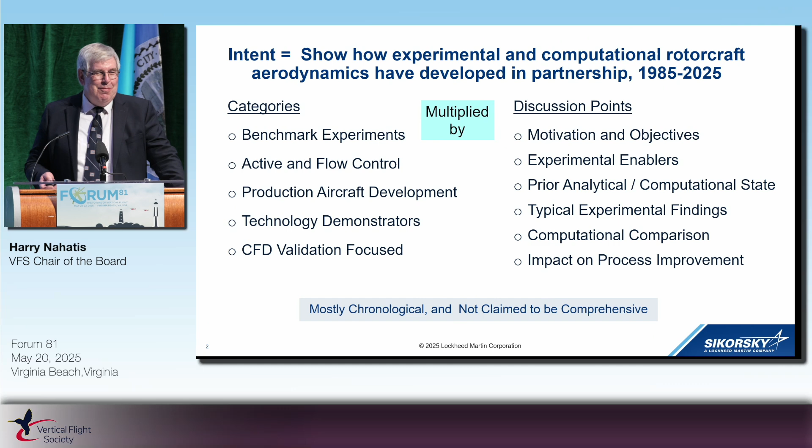It's not claimed to be comprehensive, and primarily because of the ability to get it approved through our systems, it's focused primarily on things that I and my colleagues have been involved with that have been previously published, so we didn't need to go through an approval cycle that was too lengthy.

Okay, the first topic is benchmark experiments, and the first one is oscillating airfoils and wings, which are seemingly simple geometries but needed a very significant amount of care to get to the appropriate answers.

The motivations in this period, which was the mid-1980s, was threefold: rotor blade dynamic stall, which is of interest to the helicopter community; fixed wing super maneuverability, which was of interest to the Air Force at that period; and propeller stall flutter, which was of interest to, at that time, our partner company, Hamilton Standard.

The idea, starting out on the upper right, was an 8-foot wide blade section sitting in the, at that time, UTRC wind tunnel, trying to get to realistic Reynolds numbers in the millions and Mach numbers up to 0.6.

The key experimental enabler at that point was the availability of compact, thermally stable pressure transducers that could be put into many different types of models, in this case the wing. The second was a fully digital unsteady data acquisition system. It was immature at that point, but a great improvement over analog tapes. Also, in this case, the ability to use high-powered hydraulic systems to generate any waveform of pitching motion of this model that you wanted.

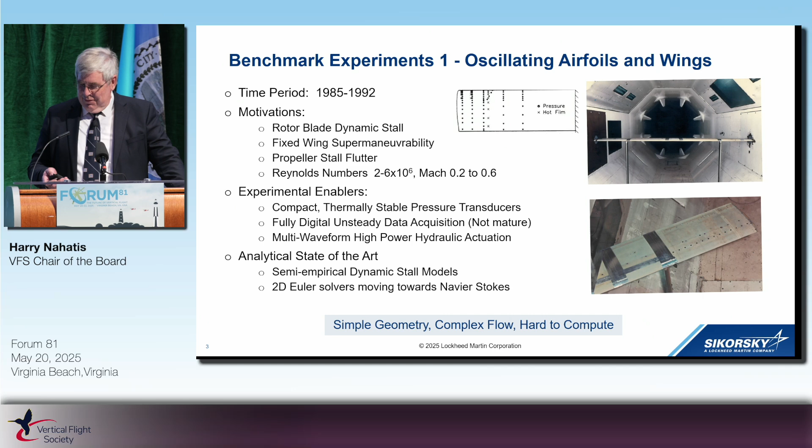Typical experimental results were many pages of black and white line plots published in that period. Color imaging was a luxury item that was expensive and complicated to do, and even more expensive if you wanted to publish it. So we were measuring pressure distributions, lift, moment, drag, laminar turbulent transition, and the effects of all the independent parameters.

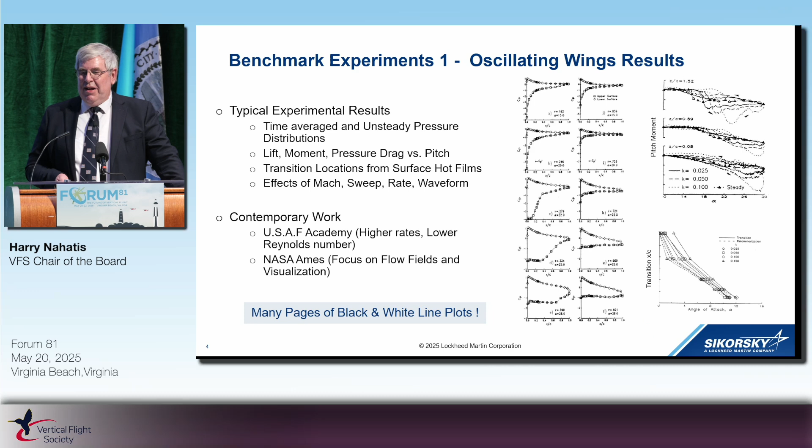Contemporary work at that time was done at many places, including US Air Force Academy and NASA Ames. Computation early on, in the 80s and 90s, was starting to use Navier-Stokes solution methods with relatively straightforward turbulence models. They didn't do a bad job, they didn't do a great job.

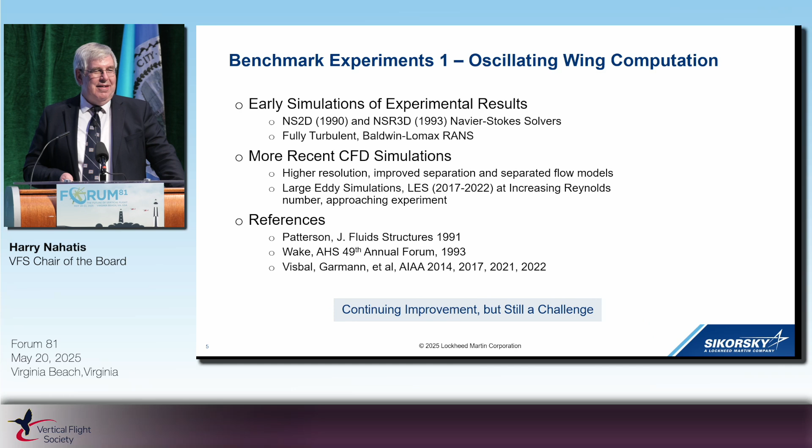More recently things have gotten much better: higher resolution, improved separation, separated flow, transition. It's still a struggle for these full-scale conditions. Large eddy simulations in 2017 to 2022 have been done at increasing Reynolds number, but it's still a challenge computationally to get the details of the flow proper at these high flight conditions.

The second series of benchmark experiments were a model helicopter rotor, slightly later, from late 1980s to mid-1990s. The motivation was a multi-measurement comprehensive data set so analysts could combine blade air loads with far field acoustics, and blade air loads with bending deflections of the blades. You wanted to expand the test envelope from relatively simple and safe conditions to high speed and thrust.

You wanted to change the tip plan form. And as important, we wanted to compare what was a UH-60A model rotor, about 10 feet in diameter, that we were testing, with the full-scale airloads blade that Sikorsky was also producing, that NASA Ames and the Army was going to be flight testing.

Again, the enablers were the pressure transducers. In this case, we were able to put 176 onto this small rotor blade. Data acquisition was more mature, and you had composite rotor blades with repeatable structural properties and long life. Importantly, this was a partnership between the US Army, NASA, Sikorsky, and UTRC. So there was some money changing hands, but a lot of intellectual effort changing hands between all these partners over that period.

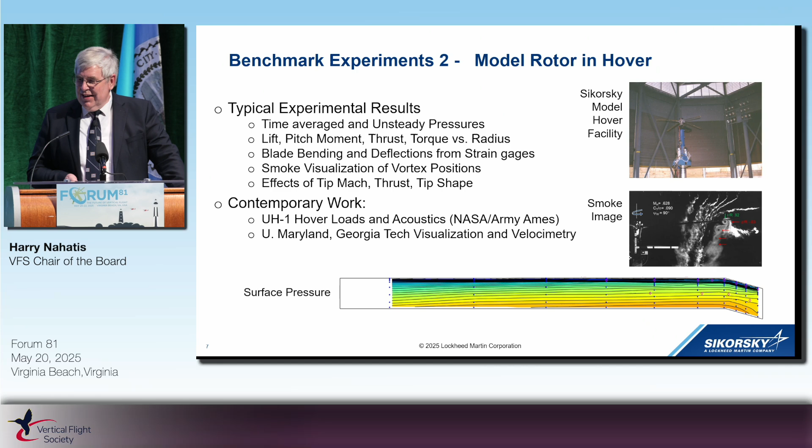Contemporary work: the Ames NASA Army folks were doing things on a UH-1 rotor before that. There was other hover work being done at somewhat smaller scale at Maryland, Georgia Tech, and other universities. And just to show that you can take data acquired before and make it in color, that was the surface pressure contours shown at the bottom of the slide.

Then the same model was put into a wind tunnel, first the German-Dutch wind tunnel in Holland in 1989. The rotor is this small thing up in the right before all of the microphones there. It was a reasonably sized rotor in a very large anechoic wind tunnel to get the acoustics as well as the aerodynamics, measuring the same sorts of things.

You then added some additional measurements when this experiment was extended 4 years later in the UTRC tunnel, getting wake positions from smoke visualization. The picture at the bottom shows tip vortices coming from one part of the blade going back in, which was actually published in Vertiflite back in those days. And you're trying to get what happens when you change all the parameters such as Mach number, thrust, and tip shape.

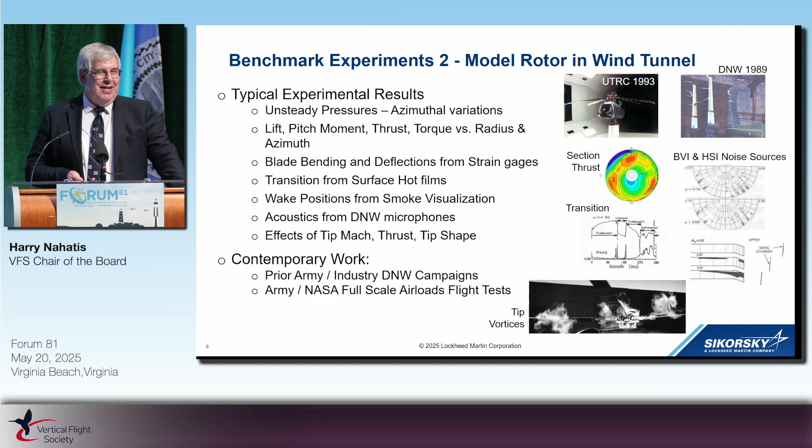There were other DNW test campaigns that the Army and NASA did in collaboration with other industry partners. And there was also a very large-scale complementary effort by NASA and the Army, taking the instrumented blades, doing flight testing in the 90s, and then going back and doing full-scale wind tunnel testing within the last 10 years. So this has been a long-term effort that's had a lot of benefits to the community.

CFD comparisons, early on, were trying to combine a little bit of data with a little bit of analysis. Prescribed wakes for hover had fair correlation. Taking measured pressures and adding acoustics was reasonable. Taking the measured aerodynamic loads and adding the dynamics analysis back in 1992 was fair. And going the other way, trying to model the whole thing again, was better, but not great.

More recently, this has all been vastly improved analytically, using transition models, blade deflections, and interactions. This is the most recent work that was done in hover, and it did quite well. There are still some differences, but this work is comparable to all of the improvements in modeling the H-60 airloads rotor, similarly with the computational CFD, CSD methods over the last 15 to 20 years.

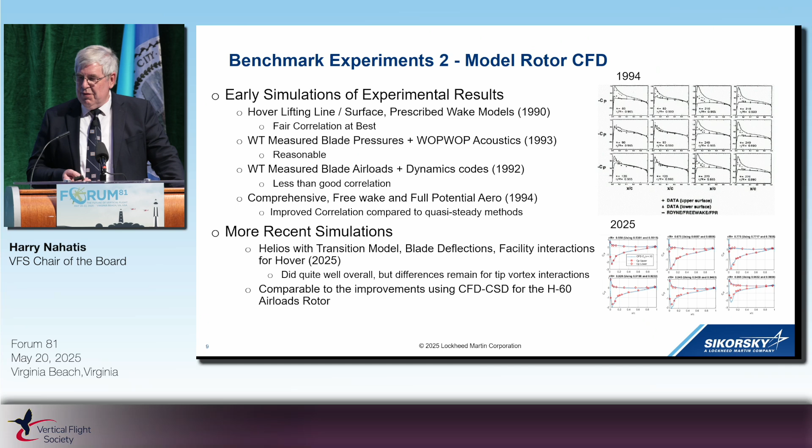The second major topic is active control. This was a very hot topic starting in the mid-1990s. Our involvement with it covered a 15-year period, up until 2010.

The idea was to find a way of breaking the paradigm of the passive rotor and improve noise, vibration, and performance. You wanted to develop the required actuators and control systems, and try to identify system-level performance. Enablers were everything talked about before in terms of measurement techniques, but also the ability to make rapidly moving actuation and control systems.

There was a lot of work being done in academia, from multiple of the people sitting here - Maryland, MIT, MDHC, and Boeing. ZFL in Germany was doing a lot of work on BO-105, CH-53G, IBC flight testing, and all of the HART II activities. The other piece, slightly later, was NASA, ZFL, Sikorsky UH-60 IBC at NFAC, which was using the same blades that had been built earlier on.

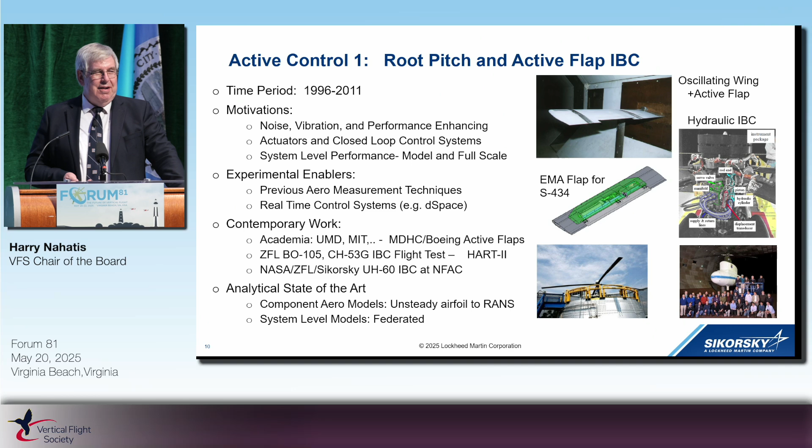The analytical state of the art at the start of this period consisted of component models for different pieces, like unsteady airfoil models. You were maybe starting to use some decent Navier-Stokes codes at that point, but the system models were really federated - you had a bunch of different models of different types that were kind of tied together.

Typical experimental results: one type of experiment was putting an active flap onto that same wing model developed before, getting pressures and air loads out to 0.8 Mach number, seeing what happens with your trailing edge flap when trying to do it during dynamic stall.

There were a variety of individual blade control efforts being done at model scale and full scale with a hydraulic actuator, trying to get there. Again, is there a performance benefit? Can you reduce vibrations? Can you help acoustics in terms of BVI? And how well is all your actuation system doing at that point?

Some lessons learned from all of this. The first one, which was not unique to us, is avoid hydraulic slip rings - trying to get high-pressure hydraulic fluid into a rotating model without having a large bucket underneath it doesn't work well. Try to avoid inserting complex systems into small legacy flight rotor blades - that's also much more complicated than it may seem at the time.

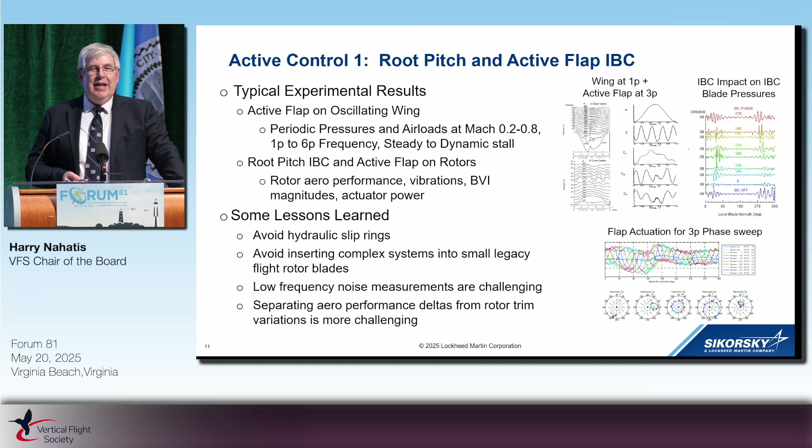Low-frequency noise measurements are challenging, even in very large wind tunnels. And the final lesson is that trying to separate relatively small aerodynamic performance benefits from the trim of the rotor is also a challenge. But it was very educational through the period, and there are many groups still working on these active control attempts, but again, that's somewhat in the past as far as we're concerned.

The next active control piece is flow control. This was late 90s to 2004. The flavor we were interested in was called directed synthetic jets. Again, you're trying to reduce drag, avoid dynamic stall of your rotor blades, and advance the technology of the flow control actuator designs and their authorities.

The basic idea of this method is that in some way you have a jet of air coming out of your airfoil, going in and out. It's helping to energize the boundary layer over the airfoil, preventing it from separating. The enablers were all the previous aero measurement and control techniques - so you're seeing a theme here, that every piece builds on its predecessors.

Another enabler was system design models for the actuators, so you could do a lot of analytical work with a reduced model early on and avoid too much experimental tinkering. The other enabler in the later period was the ability to do CFD modeling of the coupled internal flow inside the actuator and the external flow.

This was part of the DARPA micro-adaptive flow control program that was going on at the time. We were one of several teams working on that. There were also a lot of flow control activities going on at that time, and continuing, in academia.

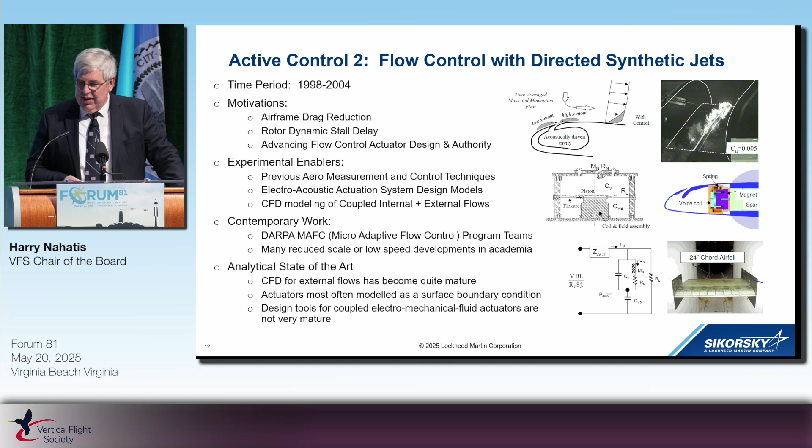The analytical state of the art by the 2000 period: external flow CFD was quite mature, but these actuators were often modeled as a surface boundary condition. You were only later on able to model the coupled system, which proved to be important in predicting the capabilities.

So the slide here is showing some of the computational results. The red is the jet coming out of the actuator slot and then coming back in again at the other part of the cycle. As you can see, we're getting very detailed analytical measurements. You're able actually to start optimizing the design.

But overall, the lessons learned was, yes, we were able to design actuators that had the authority that we needed to have, but in practice, at these realistic conditions, opening a slot hurts you before your actual flow control is able to help you, so that we were limited in the ability to meet the objectives for the higher Mach numbers that you would see on an actual rotor blade.

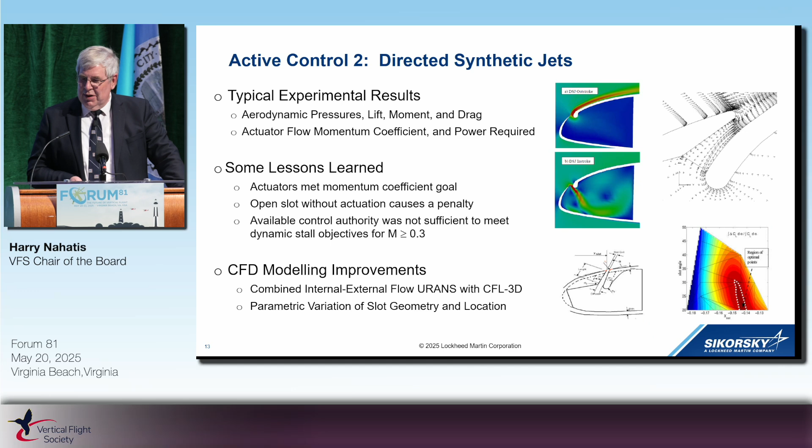So the final piece of this was a few years later in the 2012-2016 area, where we were trying to see what was the maximum ability you could get out of a flow control actuation for a rotor blade stall. The idea again was delaying stall and adding lift. This particular experiment, which was funded out of Susan Gorton at NASA, was to try and see what you could do up to a relatively high Mach number of 0.5.

So the enablers, again, were the measurement techniques, the hydraulic pitch mechanisms, all of the insight into dynamic stall and flow control that ourselves and other groups had obtained over the years. This was also using the model in the middle there, which was a 6-foot high oscillating wing that had been previously developed under the Vertical Lift Consortium project for the Glenn Icing Tunnel. CFD modeling was doing very well here for the coupled flow.

I skipped over one of the key enablers, which was the combustion-powered actuation technology from Georgia Tech, one of our partners in this. So that was really, if you're pumping hydrogen and air into the model, igniting it with a spark, that's about the strongest non-nuclear actuation system that's available.

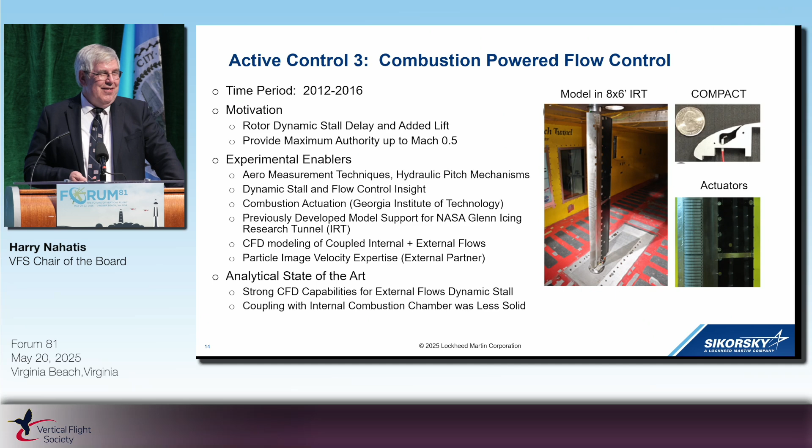So again, you're doing these related sorts of measurements, measuring the pressures and lift. We are adding particle image velocimetry there to get the flow field on the model. And the computation for the airfoil was what's called the CFL3D code, slightly more sophisticated and accurate.

The conclusions were we could clearly see the effect of flow control. The effect was primarily after stall, so you didn't really succeed in increasing the lift over the airfoil. You did increase the average lift because you were better off after it had stalled. The CFD actually did well for design and capturing the trends.

The issue became when you're looking at trying to move this onto a rotor, delivering gaseous hydrogen through a slip ring from a shaft out to the blade and delivering it on a rotor blade would be seriously challenging, even harder, I think, than delivering hydraulic fluid, and obviously could potentially have very serious consequences if things leaked.

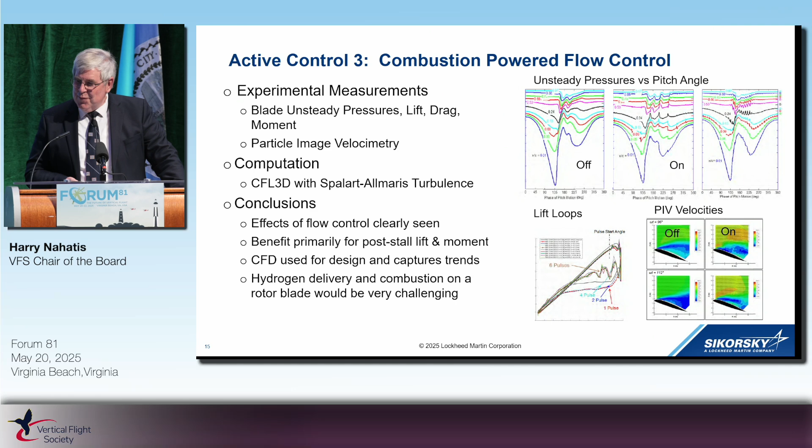Okay, so a sidebar, I mentioned PIV. The maturing of flow velocimetry over the past decade or so has been a very important addition to the experimental toolkit. The legacy was you would measure one location at a time with a hot wire or a laser Doppler velocimetry system. This required significant amount of test time, which is a significant amount of money. Early years of PIV in the mid-90s, it tended to require a local expert as a full-time activity to develop and operate it. But at that point, the resolution and the ability to go to a large distance was limited.

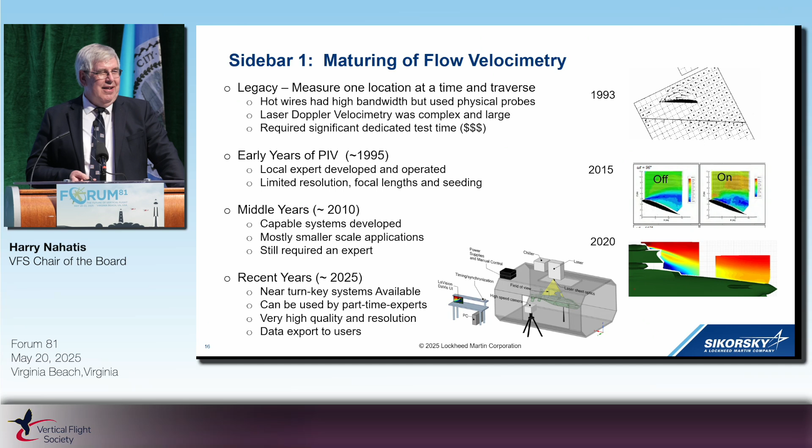In the middle years, such as in the previous experiment, capable systems were developed. It was mostly smaller scale, but it still tended to require a full-time expert to operate. More recently, near turnkey systems are available for an affordable cost, and they can generally be used by what I'm calling a part-time expert. We're able to get high quality and resolution and then export data to other users relatively quickly. The bottom is an example of that in a small wind tunnel that was added in, getting the flow field behind a model. This is a steady image, but you can do the same thing for unsteady. So that's been a significant technological improvement over the past, say, 20 years.

Okay, so now we talk about production aircraft. Production aircraft development programs were historically probably the most important use of the wind tunnel for actual industrial users.

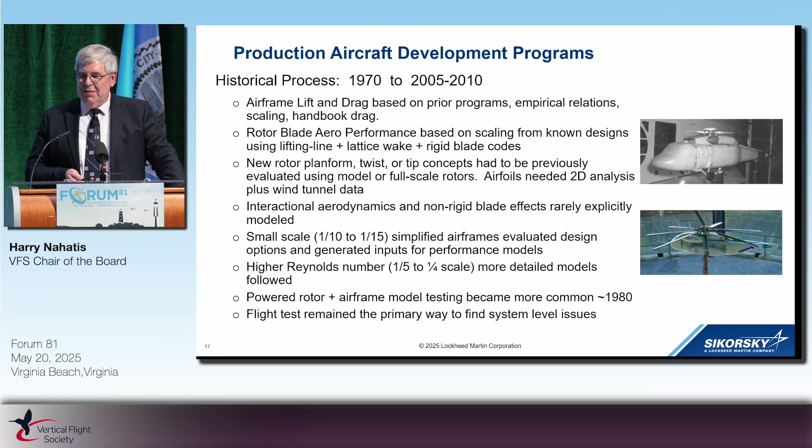So what did you do for wind tunnel testing in a development program? The number one thing was, what are the forces and moments? What's the lift, the drag, the moments on the fuselage and on the rotor? You would like to know what are the loads on the blades. You'd like to know pressures in a few locations of interest. You might put some tufts on it to identify some of the basic flow field features.

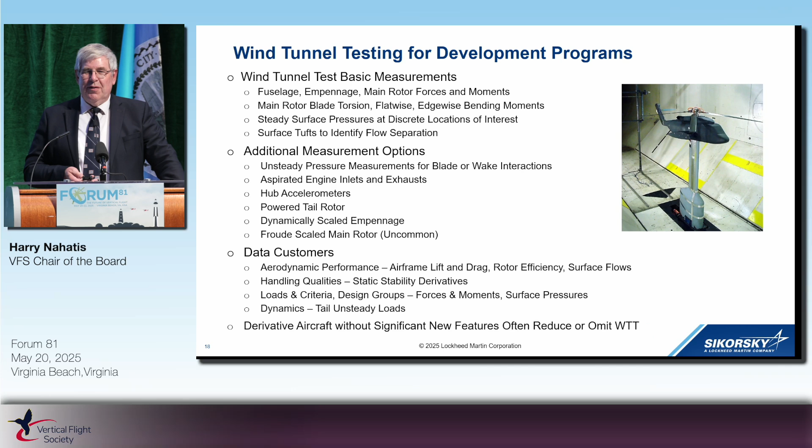You added other things on a need and budget available basis, such as pressure measurements for interactions, flow-through or aspirated engine inlets, hub accelerations. Sometimes you added a powered tail rotor, you did dynamically scaled empennage. There was a period where Dynamics was also doing rotor testing to try and get optimizations for customers, aerodynamics, handling qualities, loads, dynamics. I will mention, however, that derivative aircraft that didn't have significant new features, even in the earlier days, often were able to omit or reduce the quantity of wind tunnel testing.

So over the last 20 years, there's been continuous improvement, but at a more rapid rate. The CFD analysis of components has been grouped into larger and larger systems. You're currently in the position where you're generally able to simulate the full aircraft with tail rotors, main rotors, inlets, exhausts, internal flows, dynamics and structures, adding coupling between the rotors and the fuselage, both aerodynamically and structurally, and very recently, co-simulation putting the control systems in. The challenge remains to make it all happen quickly and reliably. And no, I'm not showing any CFD animations in this paper. There are plenty of other presentations out here for the next few days that you can see that.

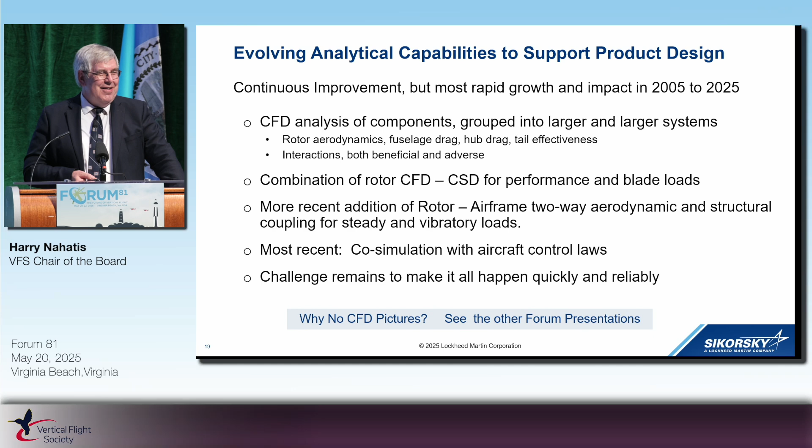The next category in development leading to an aircraft is technology demonstrators. They're different in the sense that a technology demonstrator is trying to prove some specific capability, not trying to get a unified aircraft that you're later going into mass production. So your analysis and experiment needs to focus on what's required for safe flight, what are you trying to demonstrate, and try to avoid unexpected results from flight test, or if you weren't able to avoid the results and you get them, then you need to try and figure out what happened and how do you fix it. Some examples in our company have been the X2 technology demonstrator 2008, the Raider in 2010, and the rotor blown wing that is going on now from 2023 into 2025.

I'm going to talk on the rest of this slide on the X2 technology demonstrator. That was what we call a rapid prototyping process. Analysis in the 2008 term for these configurations was kind of limited. There was no pre-flight wind tunnel testing done. The rotor design was made by one of my colleagues in the room, Dr. Bagai, using relatively simple methods plus deep aerodynamic insight. The fuselage was designed empirically, and it had a simple shape as shown in the upper right. Didn't have a lot to be analyzed. The hub fairing was based on prior wind tunnel tests from decades before, plus one small-scale non-spinning wind tunnel test, which was the effort of one of my other colleagues, Dr. Wake, sitting out here doing that. It was relatively simple, but it demonstrated that it should work. And the propeller blades were commercial off-the-shelf items.

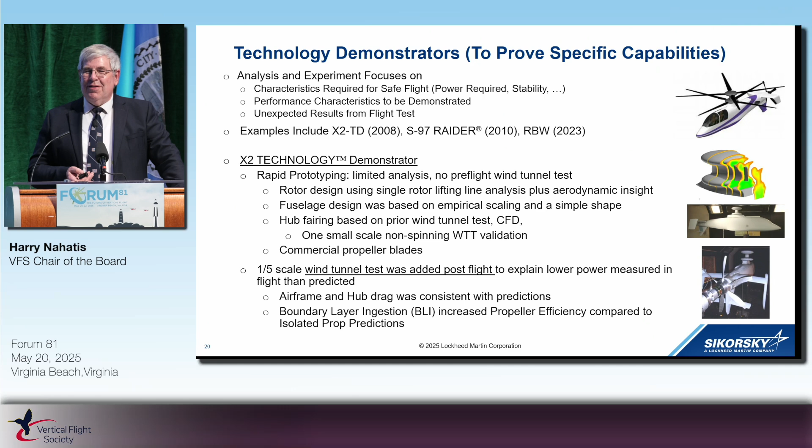Post-flight, the rare thing had happened: the power required was less than anticipated. So in that case, people were willing to go through and actually build a wind tunnel model after the flight test was through, a fifth scale model to try and explain that. That was the model in the two lower pictures, an airframe model to measure the drag and say, yes, the drag was about what is expected on the model. We had a propeller behind it and did that isolated and aft of the model, and that kind of identified that the boundary layer ingestion process, improving the propeller efficiency, was really what was causing the aircraft to fly somewhat better than expected. And that was something that was then incorporated into later designs. So it might have been nicer to have done the wind tunnel test before the flight test, but doing it afterward was still very informative.

And the second half of this was the S-97 Raider development, which was a few years later in the 2010 to 15 process. Analytical tools were improving, but high-performance computing resources were still quite limited, and it was focused more on computationally analyzing one component at a time, using different tools for each of them.

There was a series of wind tunnel tests conducted on the airfoils, on the airframe, on the hubs, since the hubs are a high drag mechanism, and that culminated in a 1/3 scale powered coaxial rotor and airframe model, which was a new test rig tested in several entries out at the NFAC at Ames.

A few years later, when you got into flight test, considerable effort had been applied to improve the CFD-CSD tools. They were also available then to support flight test and develop fixes for issues with the aircraft, and then also for follow-on pieces. So you've moved along a little bit, doing a more co-equal collaboration between the computational methods and the experimental methods, and again, learning as you're going in both cases, and then applying that knowledge to the next iteration.

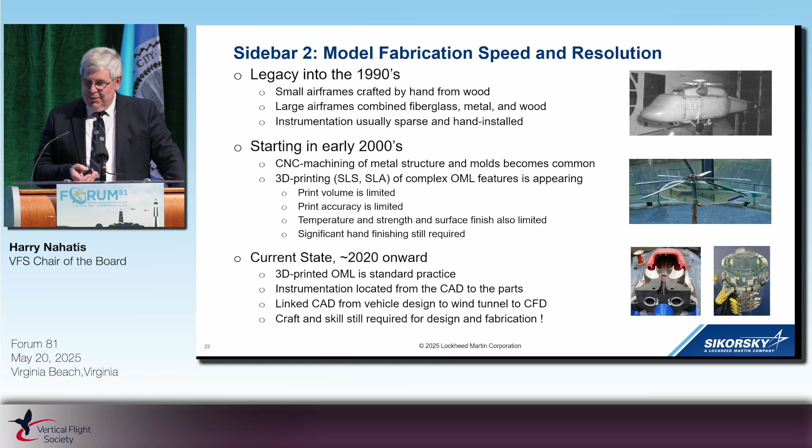This topic is focused on CFD validation. This is something that's become more important over the past few years when you're trying to get some data set that can be directly used in CFD.

This first example was somewhat accidental. The experiment was an add-on to a development program, in this case the S-92 in 2000. The motivation was rotor and airframe wakes on empennages was a concern. CFD models at that time were not mature enough, and there was very limited computational capability to practically address it. So the idea was to make some detailed flow field measurements and surface pressure measurements on the model at the end of this particular development program entry. The enabler was there was a 3 velocity component traversing hot film system available from a previous program.

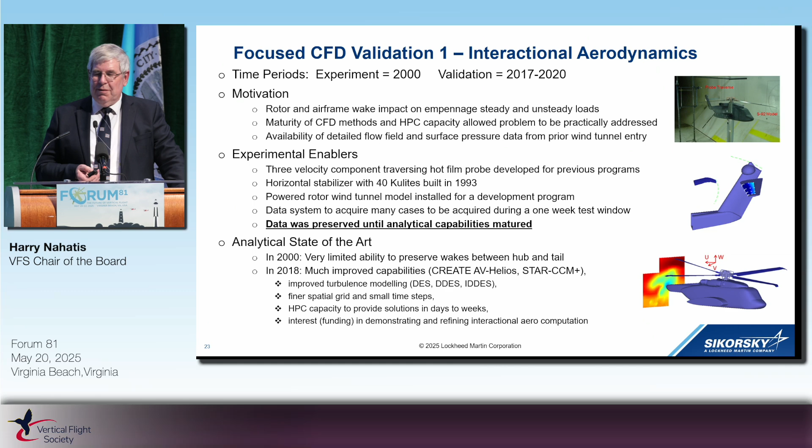The last example here was the most recent one, 2022 to 2024, focused on spinning coaxial hubs. The motivation was trying to understand the impact of the wake of the hubs and blades eventually into the empennage, into the propulsor. CFD maturity and HPC capacity was there to do this problem, but we still wanted to get some good validation data set.

This took advantage of the 3-component PIV system that was available. It took advantage of high capacity pressure tap measurement techniques, and obviously very large, complex 3D printed components which were needed to do this in a reasonable amount of time.

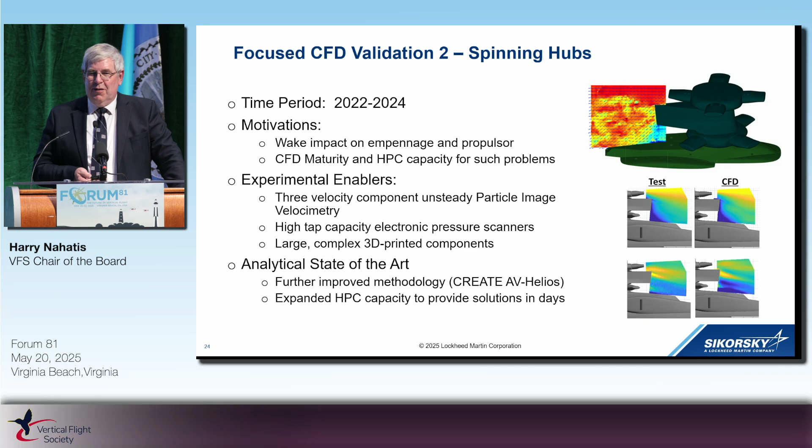This took advantage of Helios' improved capabilities, and again you're able to provide solutions in days. The video at the top is actually the PIV data showing the wakes coming off of the rotors and hub. Red is free stream full velocity, yellow is reduced velocity, and blue is full wake pieces. There were lots of comparisons between test and the CFD tools, and that was doing quite well.

We were able to conclude that this was a solvable problem using the analytical methods. So why so little talk about data systems, since that's one of the things I've spent a lot of time on over the decades? 40 years have produced a massive increase in the bandwidth, the processing speed, the capacity, the channels, the number of screens to show the data, the complexity.

But the principles have really remained the same. You want to acquire what you need, not anymore because that just takes more time and effort, but certainly not less. Know the conditions at each point. That's been an issue in many cases. If you have multiple systems you get different answers, and how do you synchronize them? So you really want to have them all tied together, simultaneous, and you monitor only what's important in real time.

We've had situations where, because I can monitor hundreds of parameters for safety of flight, you then have hundreds of parameters that can cause a false positive and get you concerned. So again, acquire what you need, not more, not less, and certainly also understand your uncertainty. How accurate are your data? What contributes to it? And how does that feed into your correlation?

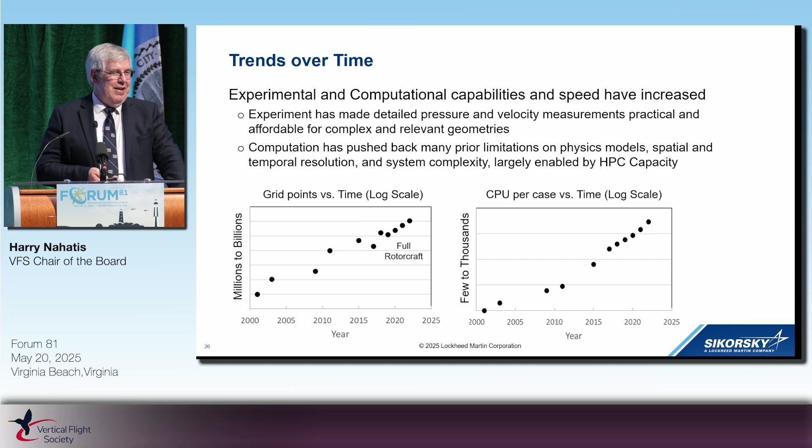However, there's still a need to think about some things that haven't changed. The focus areas have varied, started with benchmark experiments, simple geometries, focused on mechanical and flow control devices. All along there was product development and technology demonstrators, and a more recent focus on validation for complex systems for analysis, which in some sense wraps back around to the benchmark experiments of the earlier days. You want to take some configuration, accurately measure it, take what you need to take, and then compare it with what is your best physical understanding, either analytical or computational, of it.

Capabilities to produce data, both experimentally and computationally, have vastly expanded. New vehicles are more complex, and the models of them are also complex. There are, because of that, more opportunities for unexpected issues to arise, and obviously more opportunities to optimize the system to get the best out of it.

But I maintain there's still a continuing need for human intelligence in the middle of this, cross-checking both the multiple numerical models and the multiple physical models. It's always easier to find a problem if you have some idea that there's another person working on it with the same, better, or different method, getting that out. Thorough examination of the results: do they make sense? Are they consistent? If they're not, dive into it and try to figure it out. If they do make sense, still dive into it and try to figure it out.

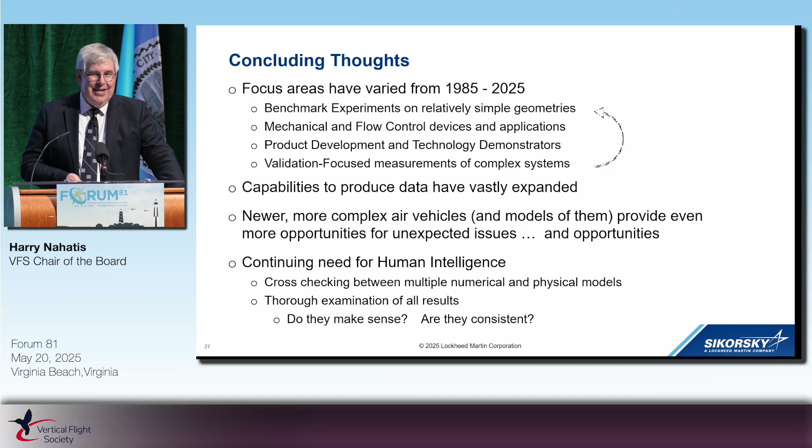I think that is the end of what I had prepared to talk about today. I think we have time for a few questions.

All right, I get the first question. That's awesome, very cool presentation, thank you. You showed a lot of computational and experimental work, and a lot of times, especially as students, we see kind of experimental versus computational. I'd like you to share your thoughts on looking to the future, how we as engineers can make the most of both computational and experimental tools to do our jobs as best we can moving forward.

Thank you. Yeah, I think you clearly need to look at both of them. One of the things that was done in the early period experimentally that's not done at this point is using your model to generate massive databases of things. At that point, that was the only way, not only in rotorcraft, but also in missiles and fixed-wing aircraft.

You have tended more to change from kind of pure testing everything to a focused experiment to measure things that you either don't understand, that are new, or enough of it to provide touch points for the analysis to tie to. Though there still are some cases where you're taking thousands of different conditions, you can often get by and identify what are the few hundreds of good conditions that span the space of the experiment, of the physics, and understand those well.